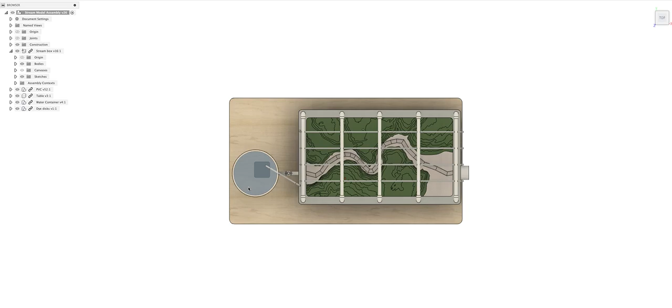So the components of the model itself include, on the left here, this is the water reservoir. This is where all the water that goes into the model comes from. In this design, it's an open top reservoir, so all of the water can be easily added using a bottle or some other container. This little black shape in here, that's intended to be a submerged pump.

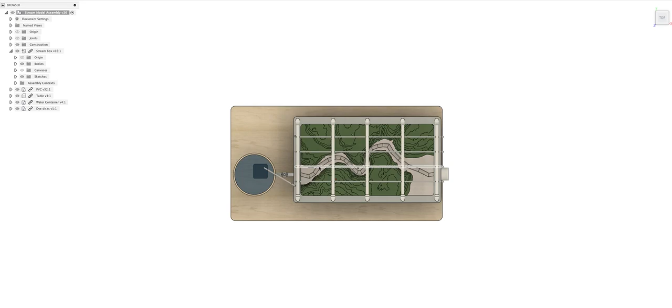This is a pump that you can find for a small fountain or fish tank. They're available on Amazon for maybe 20 bucks. Coming out of the pump, you can see there's this gray pipe up here that runs into four pipes that flow across the top of the model.

Might be easier to see from this angle. So the water flows through the pump into the pipe and across the model. This gray pipe is intended to be perforated with little holes, so when water flows through it, you essentially create a mist that simulates rainfall over the model.

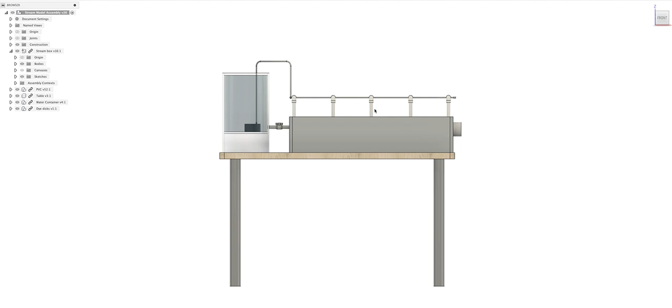These PVC pipes right here, these are just support structures. They're 1/2 inch PVC pipes. No water really flows through them.

Down here, you can see the second outflow from the reservoir. This is again 1/2 inch PVC pipe with a valve here that you can open and close to varying degrees, and the water flowing through here is intended to simulate stream flow.

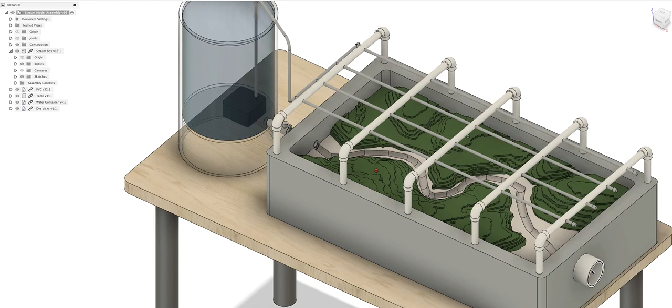So if you look at the model right here, you can see the water flows out of the reservoir into this box and into this modeled stream bed down here. And then at the far end of the model, on the right here, this is 3-inch PVC right here. This is intended to be the outflow from the model.

So this is where all of the water from the rain system and the flow system will come out.

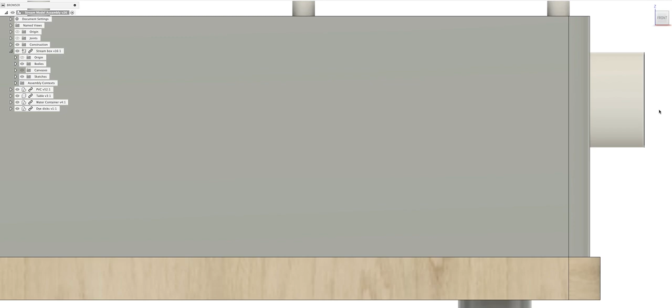And so ideally at the bottom here, you would have some kind of container to catch all the water, but you might also have a graduated cylinder, for example, and with that, students could measure the flow rate out of the model, so you could test how different stream designs in the model affect the velocity of the water coming out by measuring how quickly the cylinder fills up.

You could also assess the turbidity of the water, how much sediment is being carried out of the model, by visually inspecting the water in the graduated cylinder, or you could even take a sample of it, as we've done in lab, and using a spectroscopy machine, get an idea of the absorbance and the turbidity.

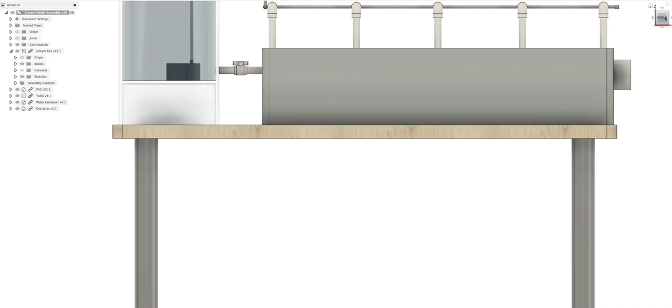So the main component of the model is this stream bed system here, and to give a better view, I'll turn off the rest of the model. So this here is a model of a stream bed.

On the top and bottom here in green, you can see this is the topography surrounding the stream. This is intended to be printed using a 3D printer. And then in the bottom here, this is essentially just sand that you would fill in, and this sand represents the floodplain of the stream.

And the idea is that students could trace different stream patterns through the sand and then get an idea of how the stream patterns affect runoff.

So one of the reasons that I chose this section of Paint Branch Creek is because it showcases a lot of different interesting land uses.

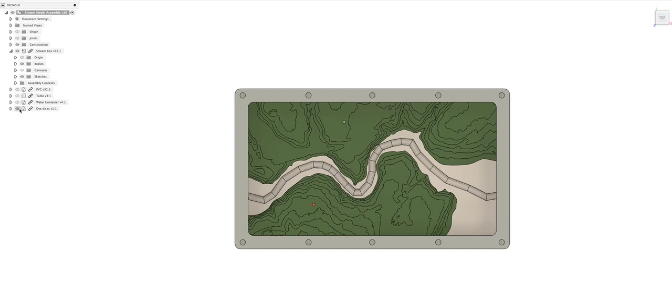You could model this, for example, by placing some kind of felt or absorbent fabric on the top section here to model the pervious nature of the woods. Then down here, you could leave the plastic bare so you'd have more runoff from the rain coming from this more residential area.

Another way you could simulate differences between different land uses is using these little dye packets that I have here. These are essentially dye in powdered form, these little discs, and when they mix with water from the rain system, dye would run off from these discs and into the water.

This little red disc right here, you could use that to simulate maybe nitrogen or phosphorus runoff from the lawns in the residential area, whereas this green dye up here, this dye disc, you could use to represent biological contamination, maybe from fecal matter from wildlife living in that wooded area, or maybe even pets that owners walk through that wooded area.

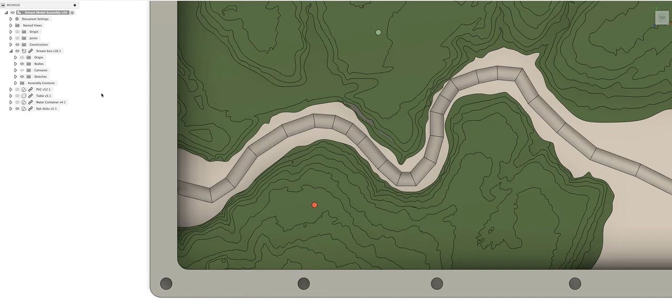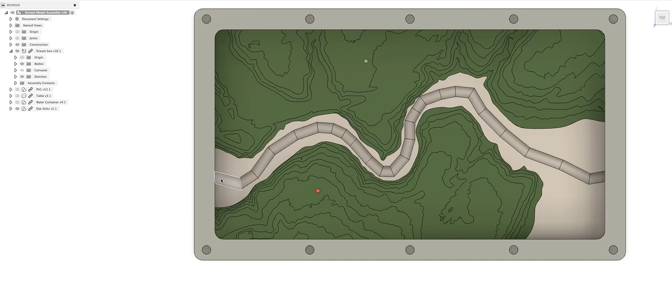In this way, you could simulate nutrient pollution and different microbes that might flow into the water due to runoff, and then the students could analyze how the dye concentrations look at the outflow at the end of the model. So a lot of the creativity of the model really comes into creating different channels through the floodplain.

You can see here I've traced a version that tends to follow the floodplain pretty well, but you could envision creating another model that's maybe a little more channelized, like this top one over here.

In this version of the model here, the stream bed is a lot more rectangular. It's deep cut, it's very narrow. There's a lot of bends here.

So you can imagine if students were to design this sort of stream bed representing more of a channelized flow, you'd expect to have more erosion, more sediment flowing out on the right here through the end. This just really shows that students can use their fingers, they can use other utensils to trace out different patterns.

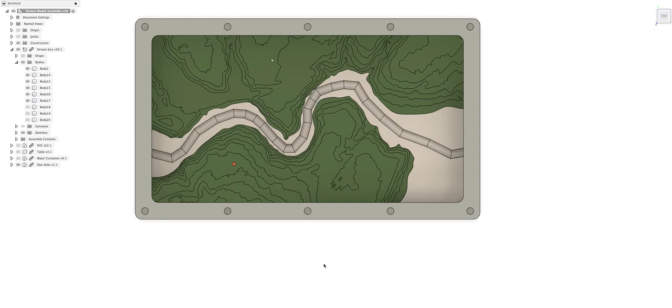You might even consider eddies or pools in the stream bed. Lots of different ways to interact with it. You could even encourage students to bring in rocks or sticks that they could place in the stream bed that could act as little buffers, like boulders or trees might in a real stream.

You could construct little engineered systems like the engineered vane that we saw in class on Paint Branch Creek that was intended to increase the amount of dissolved oxygen in the creek. So just ways of creating riffles.

There's a lot of different things that you could add. You might put in impervious, like foil channels would simulate maybe a concrete channel, and you could analyze that that flow is different from other flow.

There's a lot of creativity involved. Let me just bring these back.

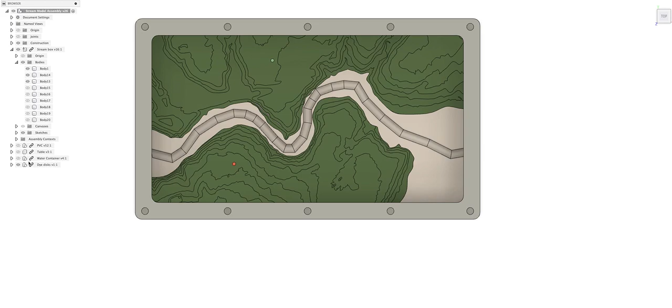There's a lot of different ways that students could take control of this model, could test out different things, see what works, see what reduces sediment, see what increases it, and then using this model, they'd get a better sense of how streams are restored in their neighborhoods or communities. It would give them a very practical understanding, and they can go through the engineering process of designing and building all within a matter of a few minutes.

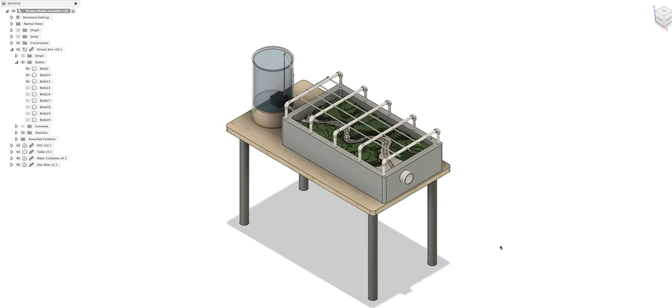As a high school student, if I had access to a model like this, I think this would really increase my interest in environmental engineering because of how it would have allowed me to test out different things to really get a hands-on experience.